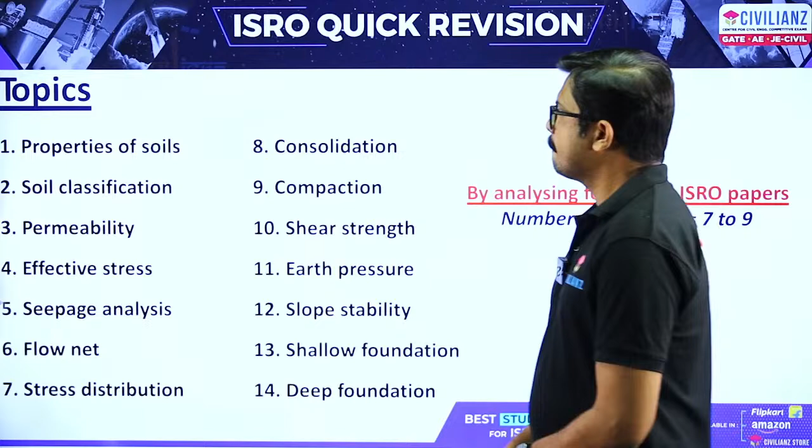So for ISRO questions, generally for 100 marks, maximum mark is 100. Within this 100 marks, 80 marks is for technical and the remaining 20 marks is for non-technical.

Again within this 80 marks, there is a further split: 60 marks from pure technical, and the remaining 20 marks from technical, but related to other subjects like thermodynamics, geoinformatics, that kind of thing you already studied. It's not difficult, but it is technical content from other subjects.

So these are the mark distributions. In the case of geotechnical engineering, by analyzing the past 4-year ISRO papers, these are the number of questions generally asked - that is 7 to 9 questions, generally 8 questions, total 8 questions.

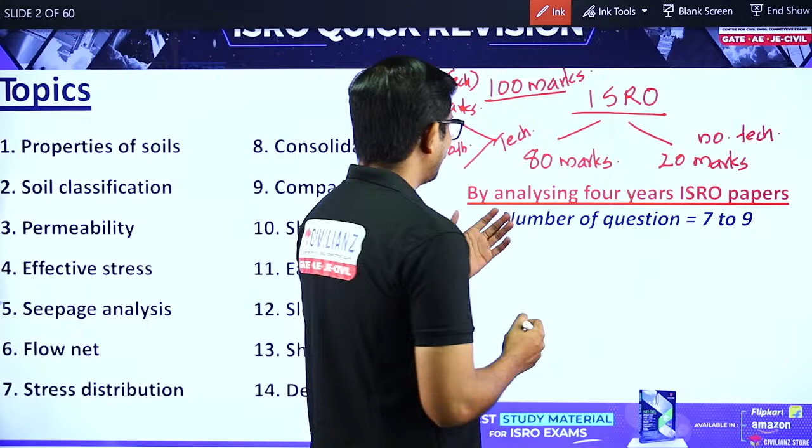If we analyze the past 4-year ISRO papers, in the case of geotechnical engineering, the questions are very easy, very basic. Everyone can do these questions easily. But the main thing is you have to go through all the topics. They are asking very simple questions, not huge formulas or lots of concept questions. But you have to go through the whole topic - these 14 sessions you have to go through.

This session we have designed for 2 hours. At the end of this session, we will discuss the past previous year questions. At that time you will get a clear idea at what level they are asking questions. Our intention is to deal with all the important formulas, everything in a nutshell. If you see this video for 2 hours, 100% sure, please trust me, you will get these 8 questions. We designed this 2-hour session like that.

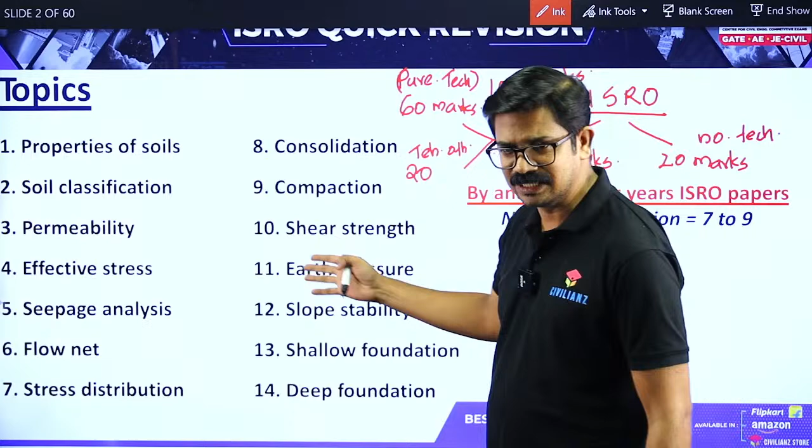So these are the topics - first one is properties of soil. This is the flow of our topics, so you have to study in this manner: properties of soil. The main problem of geotechnical engineering is if you don't know these basics, you can't understand the remaining topics - consolidation, compaction, shear strength, earth pressure, and all. Every topic has some concepts related to it.

Without wasting time, directly we can jump to topics, directly we can jump to questions. Through questions, directly we can study the formulas, basic concepts and all. At the end, definitely we will discuss the previous ISRO questions.

Initially we will do some basic questions. First you try this. The main thing is you have to do it in a very fast manner, and just type in your chat box what will be the answer. Let's start. If you have any question, just type in your chat box.

Okay, this is our first question. I will give you 1 minute for doing this. First you read this question and answer it very fast.

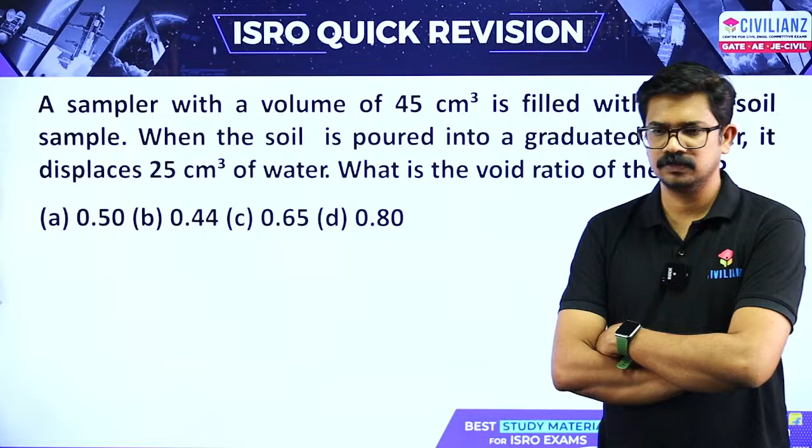Everyone please take a pen and paper and try to do it. Then only this session will be beneficial to you. Otherwise you are simply watching, it is like a cinema. First you try this question, then only you will understand. This question is very easy, it will take hardly 60 seconds, not 30 seconds.

Yes, one person got the answer. So here a sampler volume - volume means total volume, V is equal to 45 centimeter cube with a dry soil sample. When the same soil is poured into a graduated cylinder, it displaces 25 centimeter cube of water. That means, if you take some amount of water into a beaker and drop a pen in there, if it displaces some amount of water, we will get the volume of that pen. Same thing here - the soil Vs is 25 centimeter cube. This question is very direct, very easy.

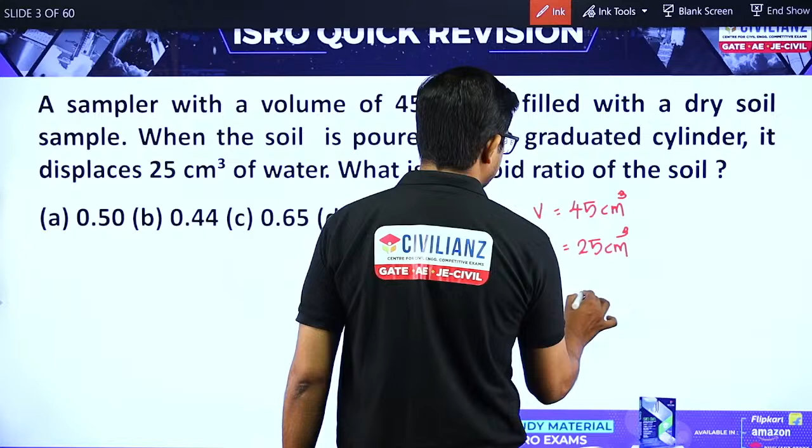So what about the formula for void ratio? e is equal to volume of void divided by volume of solid. Then what about the volume of void? Volume of void means total volume minus volume of solid, so that is 20 centimeter cube.

So here E is equal to 20 divided by 25, that is equal to 4 divided by 5, that is equal to 0.8. Many of you are getting the answer. Very good.

Can I ask one more question related to this void ratio? Which soil is having more void ratio, fine grained soil or coarse grained soil? Can anyone answer: 1. Fine grained soil, 2. Coarse grained soil.

In your chat box just say 1 or 2. Yes, very good, many of you are answering fine grained soil. Okay, very good.

Yes. So in this first chapter, generally for ISRO, if you take past 10 years question papers, they are dealing only with these initial properties of soil. So I would like to say you have to study these formulas by heart, that's all.

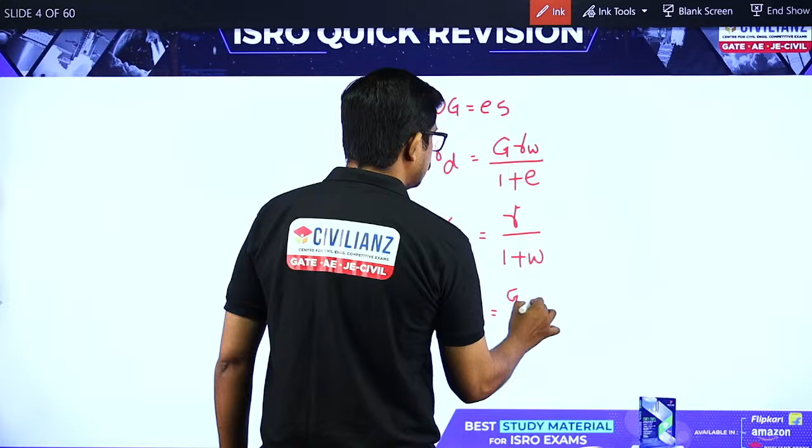Okay, so the first formula, what have we studied? Wg is equal to Es. Then these are the basic important formulas: Gamma d is equal to G gamma W divided by 1 plus E. Then again gamma d is equal to gamma divided by 1 plus W. Then again gamma d is equal to G gamma W into 1 minus Na divided by 1 plus Wg.

So these are very important formulas. Most of the questions you will get by using these formulas. And then another most important formula is...

Here this one is site 1 and next this is site 2. So frequently they are asking this question, that is why I am saying without studying this, don't go to this ISRO examination. So at site 1, initial void ratio is E1, and here gamma D at site 1 is gamma D1, then here this one is E2, here gamma D2, this one is V1 and this one is V2.

So before this, what is gamma D? Can anyone? And then what is gamma S? Most of the students may confuse these two things. What is gamma D? I am not drawing the three-phase diagram and everything, it's a little boring because you people are already familiar with these kinds of things, that is why I am not drawing that three-phase diagram and all.

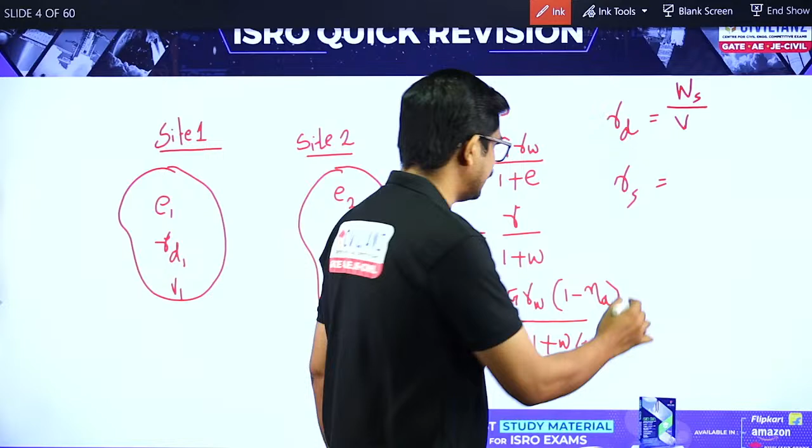So gamma D means Ws divided by total volume, this is very important. Gamma D, gamma sat, gamma D means dry density, unit weight of soil. Gamma D, gamma sat, gamma, these kinds of things are related to the pure site condition.

So if we deal with this unit weight, you have to write here total volume. Okay, then gamma S means this is just the unit weight of that material.

If you take plastic, or if you take the density of steel, can anyone comment the density of steel? What would be the density of steel in kilogram per meter cube? Please write in your comment box. 7850, yes very good, kilogram per meter cube. Very good, Abhiram, Adulya, Vaishnavi, everyone is saying.

So that one is gamma. In the case of soil, gamma S is Ws divided by Vs, volume of that particular material. This one is gamma D.

Then one more thing I need to clarify here is, this one is our ground level. Here the water table is there. Here soil is there. Here water table, this is our ground level.

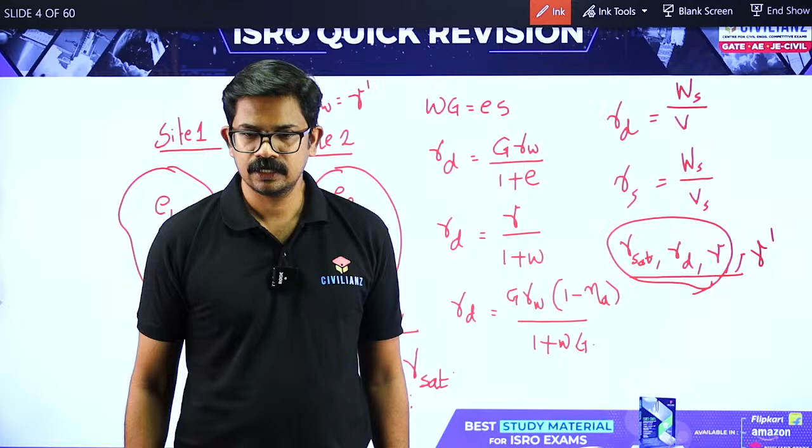Nivedya Peer wrote gamma sat. Very good, so this one is gamma sat. That is very important - definitely some people may misunderstand that as gamma sub. Gamma sub means at the time of effective stress, wherever you see gamma sat minus gamma W, at that time only you will write gamma sub. You can't directly write gamma sub. So gamma sat, if water table is there, you have to write gamma sat. So this one is gamma sat here.

So for gamma sat, one more formula is there like this. Gamma sat is equal to gamma W into G plus E, S divided by 1 plus E. Gamma sat.

So this basic you should know, that is very important. These are very basic things. In geotechnical engineering, there are a lot of concepts like this that you have to know - then only you are able to do numerical questions. Questions are very easy. You can see in geotechnical engineering, the questions will be only 2 lines or 1 line or like that - very easy questions, but there are a lot of concepts within this. So this formula you need to know by heart.

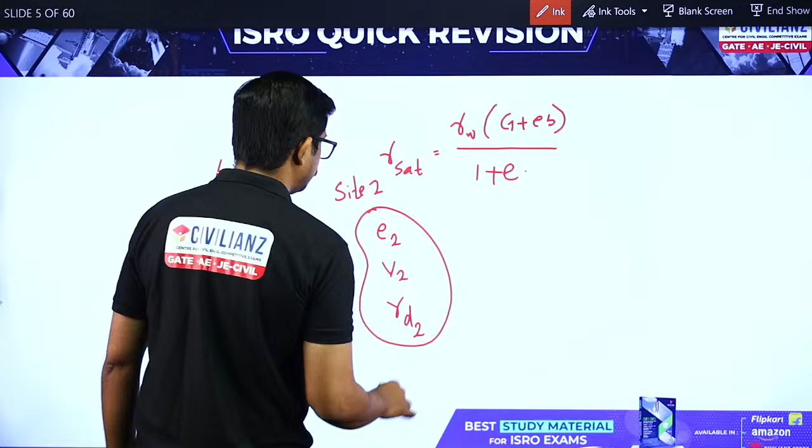So here we stopped - site 1, site 2. This formula is very important, every year frequently they are asking this. I will write here: Site 1, and then site 2. Here void ratio is E1, volume V1, this one is gamma D1; here E2, V2, and gamma D2. So if you are moving soil from here to here, definitely what will happen? Void ratio will change. So there are some relations connecting void ratio, gamma D, V1 and V2.

So first one is gamma D1 divided by gamma D2, that is equal to V2 divided by V1, that is equal to 1 plus E2 divided by 1 plus E1. It is very easy. Gamma D means WS divided by V, that is why inversely proportional. Then one more formula is there, G gamma W divided by 1 plus E - so this one is directly proportional. If you write V2 here, E2 here, V1 here, E1 here. Did you get what I am saying? So this formula is very important, most of the questions we can try using this formula.

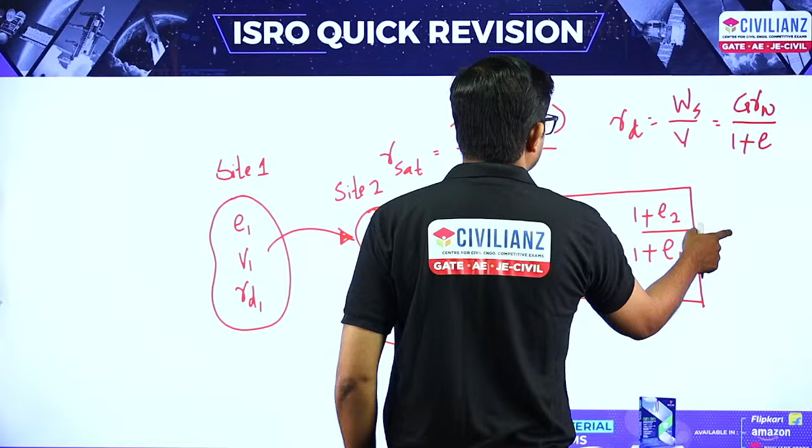Okay, so let us try this question. Try this question - first find out the answer of question number 1, then question number 2. Try to find out this. Whenever you get the answer, just type it in your comment box. Do it very fast. First you just draw the 3-phase diagram, it will give you a clue. If you are very slow in calculation, you can use a calculator, no issue.

This is just a quick revision. So here we are trying to check your memory capacity, which formula you know. Do you remember all the formulas and all? First answer.

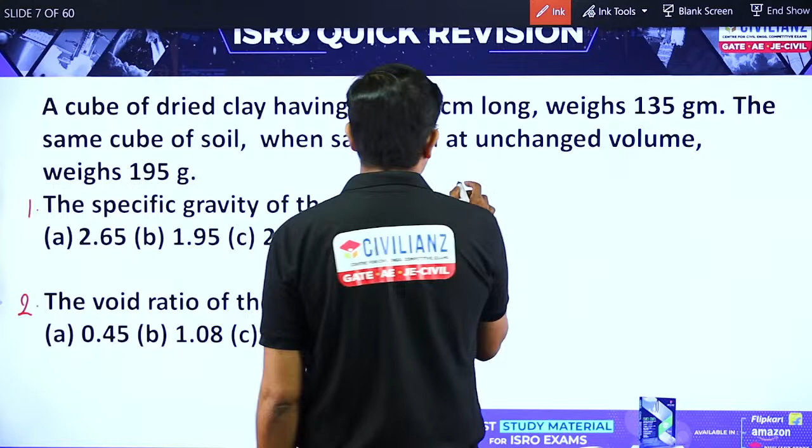A cube of dry clay having side 5 centimeter long. So here 5 centimeter long means - dry clay, they are saying dry clay only, so dry clay means it is like this. What about the volume here? 5 into 5 into 5, that is equal to 125 centimeter cube. So here volume is 125 centimeter cube. Then weight - weight of soil means here 135 gram. Is it okay? Weight is 135 gram.

Same cube of soil when saturated and unchanged volume. Unchanged volume means same cube of unchanged volume, fully saturated. When saturated means fully saturated. Here in question, if they mentioned saturated, means fully saturated - they can't mention fully saturated like that. Saturated means fully saturated, if it is partially, definitely they will mention partially saturated. So here also same, weight of soil is same - it can't change, weight of soil can't change. Unchanged volume, weight - so here total weight is, they have given 195 gram.

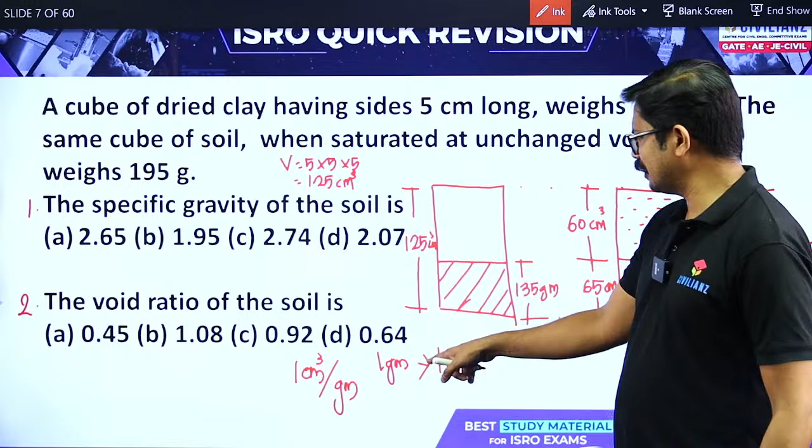So 60 gram of water will occupy how many volume? How much volume? 60 centimeter cube. So what would be the volume here? Here 60, total 125 - they have given without changing the volume, so here 65. Did you get this idea? Did you get the idea of this? 1 gram of water occupy 1 centimeter cube. Yes, very good - Shibna, yes, Nivedya also saying 65. Very good, very good, now everything okay.

Specific gravity G. Specific gravity of soil G is equal to gamma S divided by gamma W. So what about the value of gamma S? Gamma S is equal to WS divided by VS - WS 135 divided by VS 65, WS divided by VS. How much you will get?

2.07 gamma S, gamma W means density I am taking. I am simply writing the formula, that is rho S divided by rho W. Rho W is 1 gram per centimeter cube. So here 2.07 divided by 1, so the answer is 2.07.

First answer. Next, void ratio of the soil is volume of void divided by volume of solid. E is equal to 60 divided by 65, that is equal to 0.92.

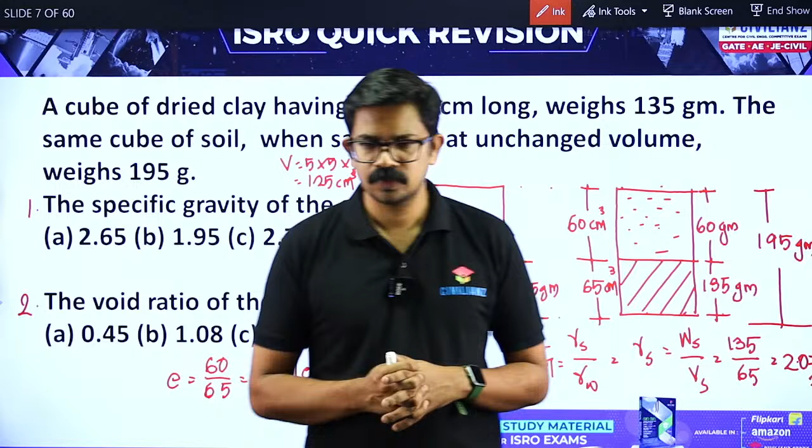Okay. Yes, try this question, beautiful question. For every competitive, most of the competitive examinations, you can see this question. So if you take 5 exams, minimum 2 examinations they will ask this question. In 2 papers you can see this question. So what is the answer?

Option A. Shibna is saying option A. Yes, one more please. Yes, Harinarayan is also saying option A. Yes.

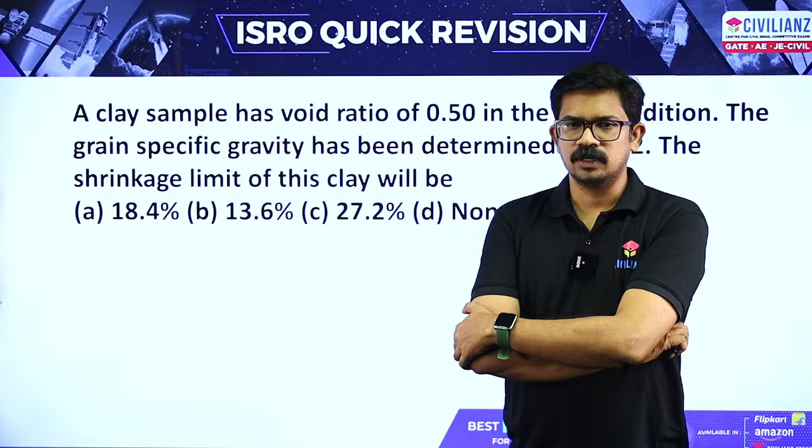Actually, I included only very few questions, basic questions, because for ISRO they are asking very basic questions. They are not going into this much level. They are simply asking what is shrinkage limit, what is gamma D, what is gamma sat, that kind of questions they are asking. So every student, most of the students, those who went for GATE coaching, state PSC coaching, definitely they will get 8 out of 8, 100% sure.

It won't take time. Okay, so class, void ratio. Here void ratio they have given. So before that, you should know what is shrinkage limit. Shrinkage limit means, are you familiar with this?

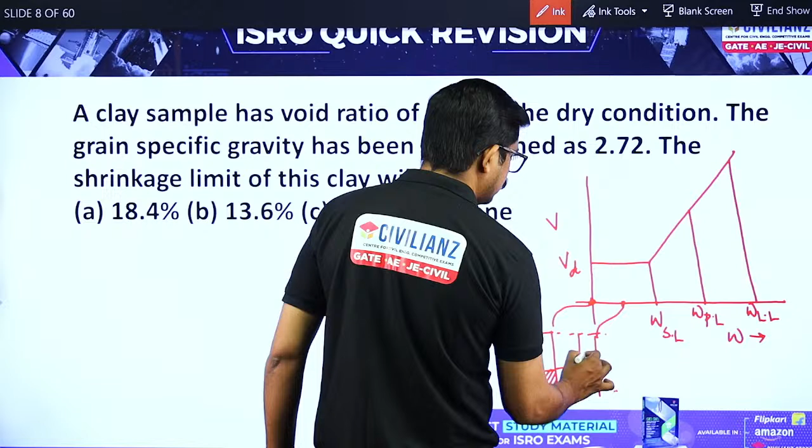So shrinkage limit means it is the minimum water content at which soil is 100% saturated. So if we draw the 3-phase diagram here, you can see dry soil. If we draw the three-phase diagram at this particular portion, without changing volume, without changing the volume, here some amount of water is there, partially. Here within, from this region to this region, soil is partially saturated.

Did you get the idea? Soil is partially saturated. So at this particular point, within this void, the soil will occupy full of water. So that is why we are saying minimum amount of water content at which soil is 100% saturated. Did you get the idea? That minimum is very important. So minimum water content soil is 100% saturated.

So here in this question they have given the value of shrinkage limit. They have asked the value of shrinkage limit. So here the key point is, at this particular point and dry state, what will be the soil condition? Volume are same. Here the volume are same. There is no change in volume from here to here.

So automatically, here void ratio is E. What would be the value of void ratio here? That is also E. So definitely we can write the formula Wg is equal to Es. Our intention is to find out the water content at this particular portion. The key point is void ratio at here and here are equal.

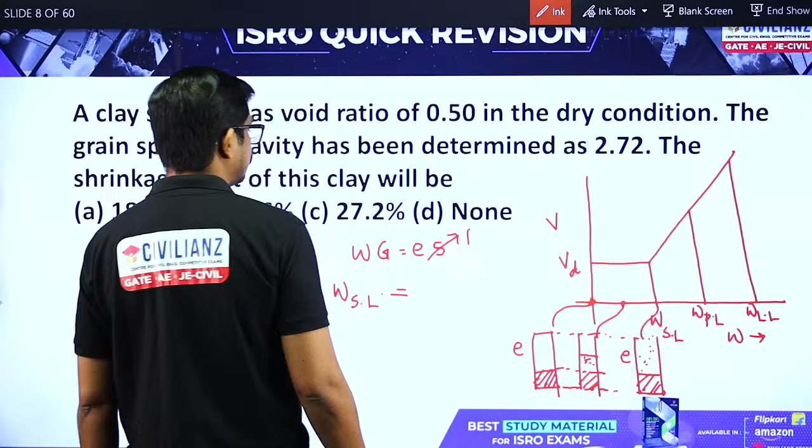That's all. So void ratio they have given. Soil is fully saturated at this particular point. Soil is fully saturated. So W, that is equal to W shrinkage limit into G, that is equal to E. S is equal to automatically 1, fully saturated soil. So W is equal to 0.5 divided by 2.72. So what would be the answer? 0.184 is the answer.

So for every competitive exam, if they ask questions from this particular topic, meaning liquid limit, shrinkage limit and plastic limit, the most important question they will ask from this shrinkage limit. Okay, so you have to study shrinkage limit in geotechnical engineering, that particular topic, liquid limit, plastic limit and shrinkage limit. You have to study shrinkage limit. Okay, so at a glance we can say, so what is the liquid limit?

What I am elaborating in this particular portion is that in the past 10 years, they have been asking questions only from this particular topic. That is why if a student just studies these basics, properties and all, they will definitely get a minimum of 4 questions. That is why I am elaborating, not simply going with the formula and all.

So here, water content, volume, shrinkage limit water content, plastic limit, liquid limit.

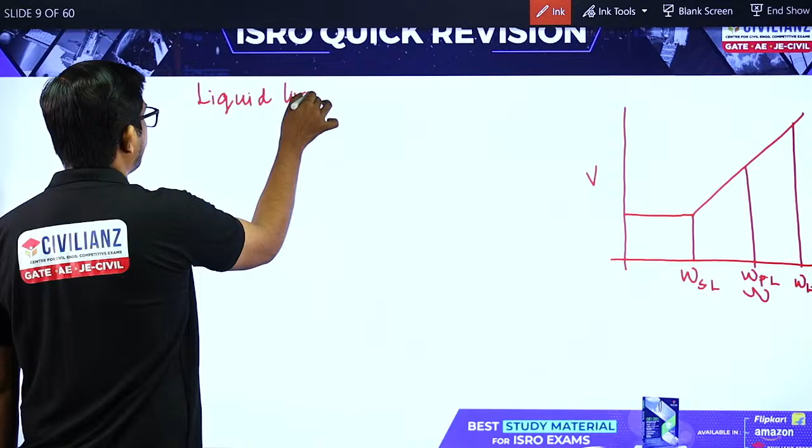What is liquid limit? Yes, very good, 2.7 kilopascal. So it is the water content at which... I am expecting that kind of answer, not the water content at which soil changes from liquid state to plastic state. So that is the correct answer. Vaishnavi is answering that shear strength of soil is equal to 2.7. Very good. So it is the water content at which the soil has an arbitrary shear strength equal to 2.7 kilopascal. At that particular point, the value of shear strength is equal to 2.7 kilopascal.

So anyway, liquid limit means we can mix the soil with water. At that particular point, if you mix any soil with water, liquid limit means that the value of shear strength is equal to 2.7 kilopascal, that's all.

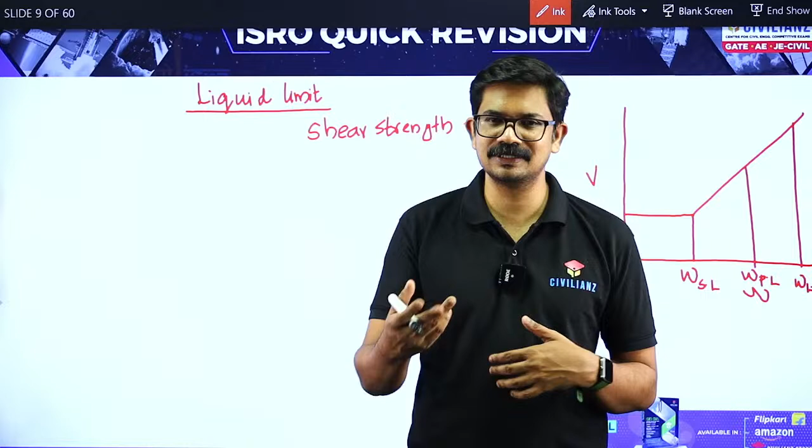That is why, while doing the Casagrande test for finding out the liquid limit, we are using the Casagrande apparatus, and they are taking 25 number of blows. At 25 number of blows, the soil will attain 2.7 kilopascal. So one more definition is there: it is the water content corresponding to 25 number of blows in a Casagrande apparatus. So if someone asks you what is liquid limit, at the time of interview you have to say this kind of answer. That is very important.

Okay, liquid limit, then plastic limit. Plastic limit is the water content at which we can mold an arbitrarily fixed shape of a certain dimension, of size 3 mm. That is why we are saying thread test. Here, arbitrarily fixed shear strength, arbitrarily fixed size. Vaishnavi is answering 3 mm. Very good, I am very happy.

Then shrinkage limit, which we have already discussed. It is the minimum water content at which soil is 100% saturated. At this particular water content, we can mold that soil into different shapes, we can deform it without breaking or cracking. Did you get the idea? So these things are very important.

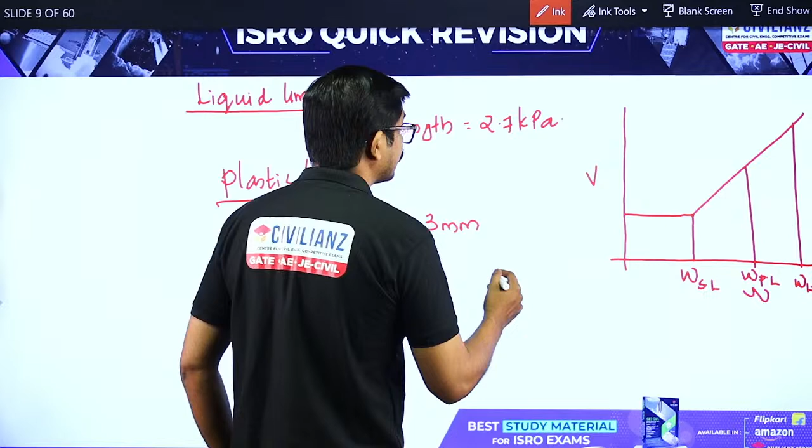And then another important thing is some indices: liquidity index, plasticity index. The first one is plasticity index, IP, equal to WL minus WP. Shrinkage index is WP minus WS. Toughness index is IP by IF.

Then liquidity index, these two are very important. Liquidity index equals W minus WP divided by IP. Then consistency index equals WL minus W divided by IP. So these two are very important.

Most exams ask these two things: liquidity index and consistency index. But in geotechnical engineering, plasticity index is very important. For exam point of view though, these two are very important. Look at liquidity index, W minus WP divided by IP. If we add IL plus IC, that is equal to 1.

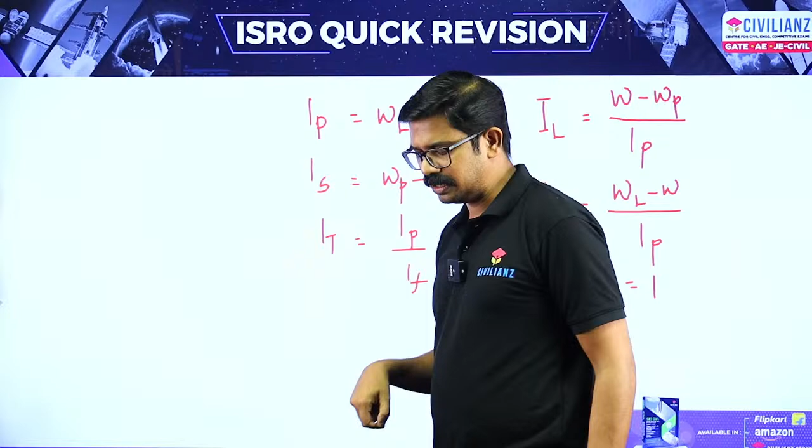So at least you have to study these formulas, you have to remember them before going to the exam. That's all you have to do daily. Once you wake up at 5 or 6 o'clock, you just go through this formula in your formula book.

Try this question. Beautiful question, you can use a calculator also, no issue. It will take hardly 1 minute. It is not an essay type question, very easy question. Try this, and once you get the answer, just type it in the comment box.

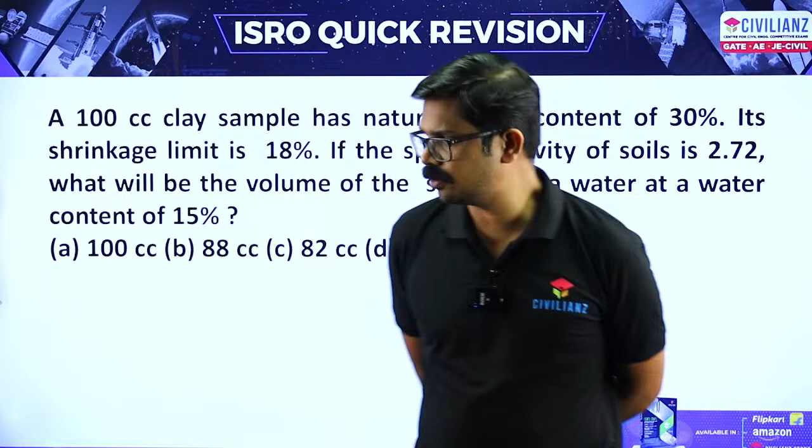Option A. Archana is saying option A. Is there any other answer? Vaishnavi also says option A, okay.

Let me try this question. Option A means 100 centimeter cube. So a 100 centimeter cube clay sample has a natural water content. So volume, they have given V1, that is equal to 100 centimeter cube.

So in our classroom, we have done almost 30 to 60 questions like this. Okay, water content.

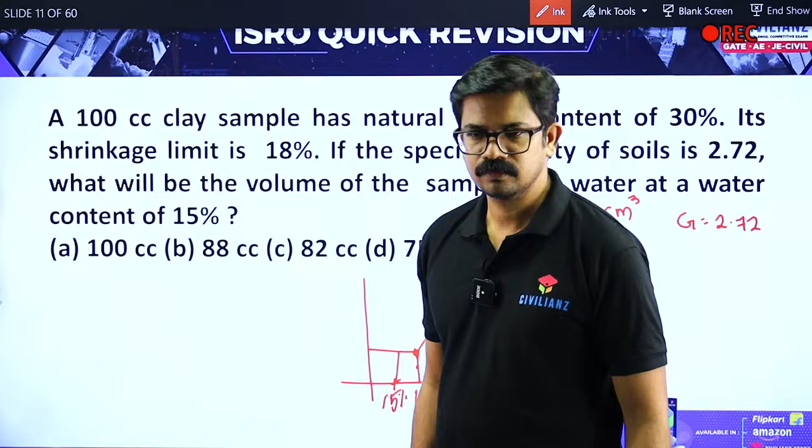Then what would be the volume here? At 18% and 15% the soil is having the same volume. So what do we have to do? We have to find out the volume at this particular water content. Did you get the idea? Here at 18 and 15% the soil has the same volume. The question asks what would be the volume of sample at 15%.

At 15%, what would be the volume for that water content? W2 is equal to 15%. 15% means same as 18%. If you find out the 18% volume, that's okay. Here soil is fully saturated at this particular water content, so Wg is equal to eS, and definitely here you will get the value of E1.

What would be the value of E1? E1 is equal to 0.3 into G, 2.72. So what will be the answer? 0.3 into 2.72 equals 0.816.

E1 done. Next, water content given is W2 or WSL, equal to 0.18. G remains 2.72. So we consider E2 equal to 0.18 into 2.72, which is 0.489.

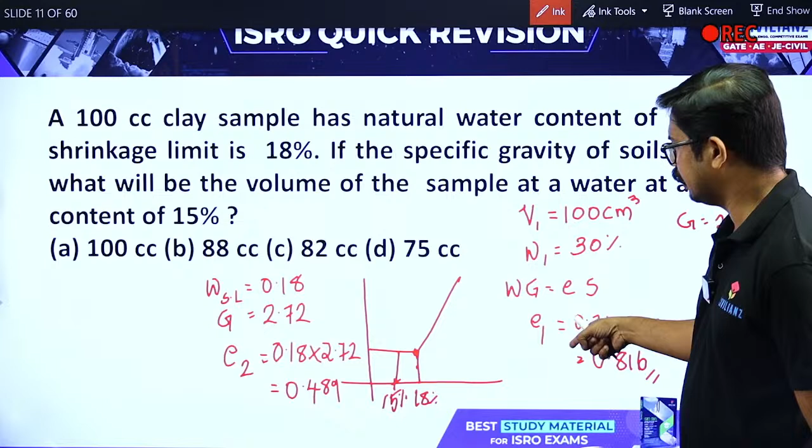E2 is 0.489. So here we know V1, E1, E2. We need to find out V2, the volume corresponding to this void ratio. Which relation will we use? V1 divided by V2 equals 1 plus E1 divided by 1 plus E2.

Here V1 is 100, V2 is what we need to find out. 1 plus E1 means 1.816, divided by 1.489. So 100 into... 1.489, that's 148.9, divided by 1.816, equals 81.99, so 82 is the answer.

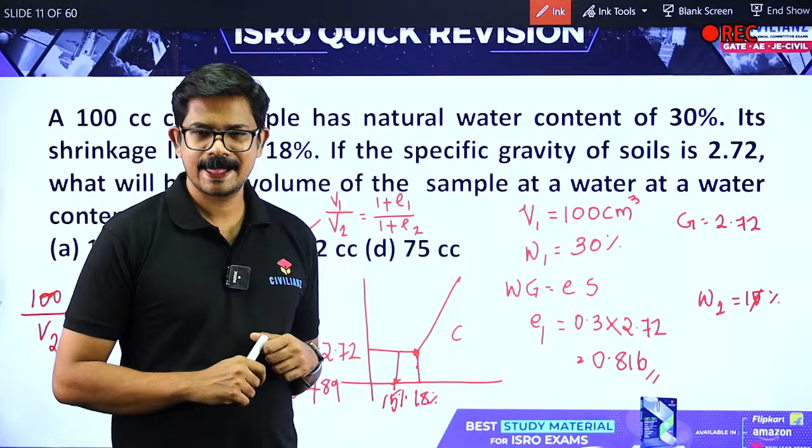82, option C. Then how do you get 100 centimeter cube? What is the logic behind that? Is it clear? This formula is very important: V1 by V2 equals 1 plus E1 divided by 1 plus E2. We can apply this formula many times indirectly.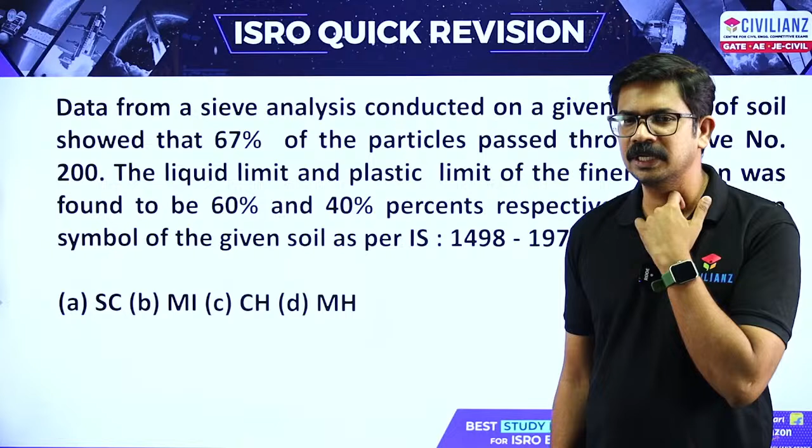No. Yesly, no. Okay. Yesly first commented no, then C. Okay, C, yes. I thought Yesly you didn't understand the last question, that is why I am asking. Did you get the last question? Yesly, did you understand the last question? Okay.

Data from the sieve analysis conducted on a given sample of soil show that 67% of particles pass through sieve number 200. So sieve number 200 means, what is sieve number 200? Sieve number 200 means sieve size of 75 micron. Then sieve number 4 means 4.75 mm. At least you have to study these two sieve numbers.

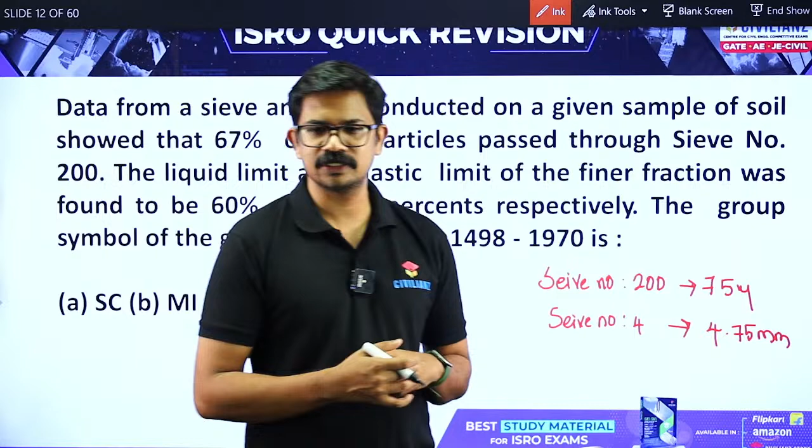Can anyone explain what is the connection between sieve number and sieve size? Is there any connection between sieve number and sieve size? Please comment, quick, comment it in a short way. Very good, Vaishnavi is saying number of holes per inch. Exactly, number of holes per inch. Take just one linear inch dimension, just count the number of holes.

If you take a linear inch dimension of 1 inch, for 75 micron size holes, you can see 200 number of holes. Here for 4.75 mm, sieve number is 4, meaning 4 number of holes. That's all. Okay.

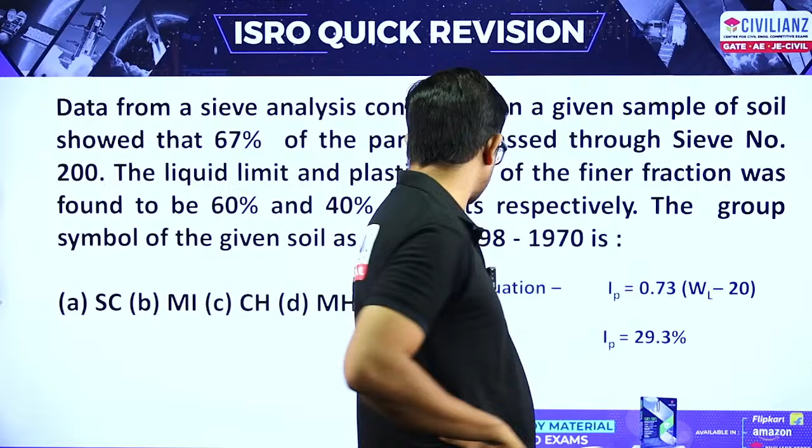Then in this question they have given data like this. So here we have to use the plasticity chart, A-line formula. This A-line formula itself they have asked several times. No need to draw the A-line plasticity chart and all, but you have to study this A-line formula: IP is equal to 0.73 into WL minus 20.

So what would be the value of IP by substituting WL here? 29.3. Then IP by using our usual formula: IP is equal to WL minus WP. WL minus WP means 60 minus 40, that is equal to 20% here.

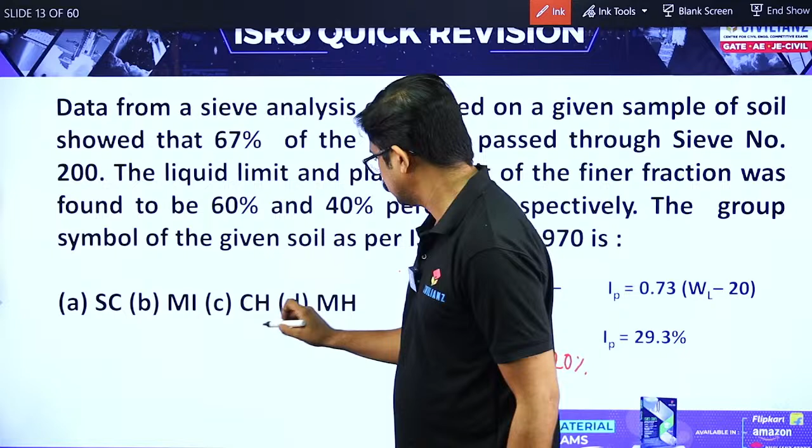What do you have to look at? Whether this value is greater than or less than this A-line formula IP. If it is below the A-line, that soil is silt or organic. Did you get the point? Here this value, 20, is less than 29.3, so it means that soil is silt or organic. Just check in your options if it is silt or clay there, so we can remove these two. Either this one or this one is our answer.

Then just look at the liquid limit value. Here the value of liquid limit is less than 35%, it is low compressible. If it is between 35 and 50%, it is intermediate compressible. Then if it is greater than 50%, highly compressible. So here greater than 50%, 60, so here silt, highly compressible silt.

The same question they asked in our last Kerala State PWD examination, Kerala State PSC PWD examination. Same question they asked, the same question that we did in our class also, without changing the numerical value. Okay.

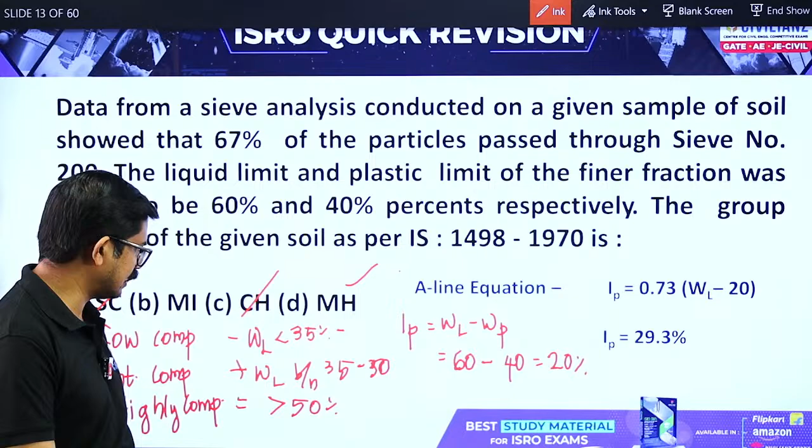Sometimes they will ask directly A-line formula. What is A-line formula for IP? Sometimes they will ask plasticity chart. Sometimes they will ask what intermediate compressible means, or highly compressible means. The value of liquid limit between, or liquid limit greater than 50% or something like that.

Okay, this question is very important. You have to study this question. You have to just mug up this question. Okay, try next question.

What is the answer? Quick. One word type of question. Just read this: flow through the soil is laminar when? Reynolds number is less than 1.

So in the case of pipe flow, what would be the value of Reynolds number? Just comment it, Reynolds number should be less than, just comment that number. In the case of pipe flow, yesterday you have studied, Anand sir already took pipe flow, water flowing through pipe. Yes, 2000. In the case of open channel flow,

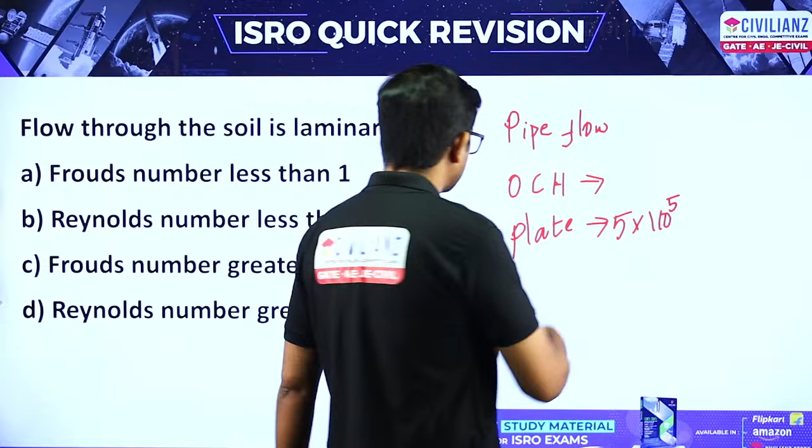These are the things that you need to remember in the case of Reynolds number. Okay, these are the previous questions: pipe flow, open channel flow, plate flow, and all.

Yes, so try this question. During permeability test on a soil sample with a falling head permeameter, equal time intervals are noted for drop from H1 to H2 and again from H2 to H3. Then, condition. C is the answer, they are saying.

Yes, so here, permeability K is equal to AL divided by AT into log H1 by H2 to the base E. That is the equation. So here in this question, this one is H1 and this one is H2 and this one is H3.

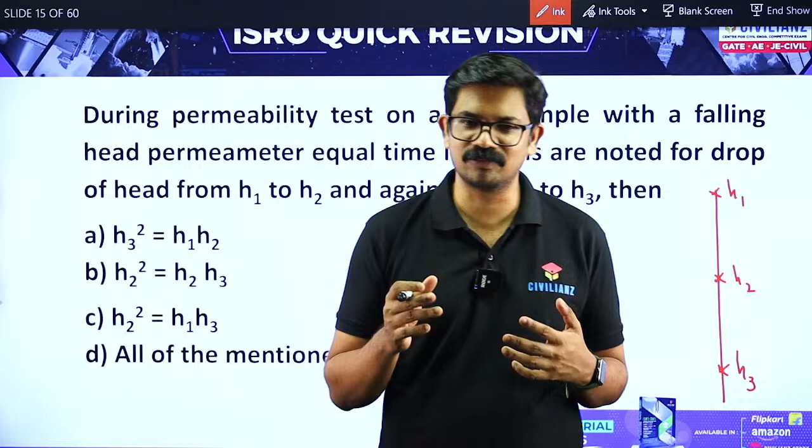Actually, this session is just a revision. If you don't have thorough knowledge regarding this permeameter, hydraulic gradient, this and that kind of thing, definitely you can't understand. Okay, so once you sit in our classes and once you are familiar with all the concepts, then only you will understand what we are saying. Otherwise, students, they won't understand what is this line, what he is saying. Okay.

So first you study the concept, what is falling head test, then how this formula arrived. So here, this one is H1 and this one is H2 and this one is H3. So here in this question, they have given this one is T, same time. Time is the same.

So we can write T is equal to AL by KA into log H1 divided by H2 to the base E. So both the times are equal, H1 to H2. Then again we can write AL by KA into log H2 by H3 to the base E. So here we can write H1 by H2 is equal to H2 divided by H3. So here H2 square is equal to H1 H3. Option C is the answer.

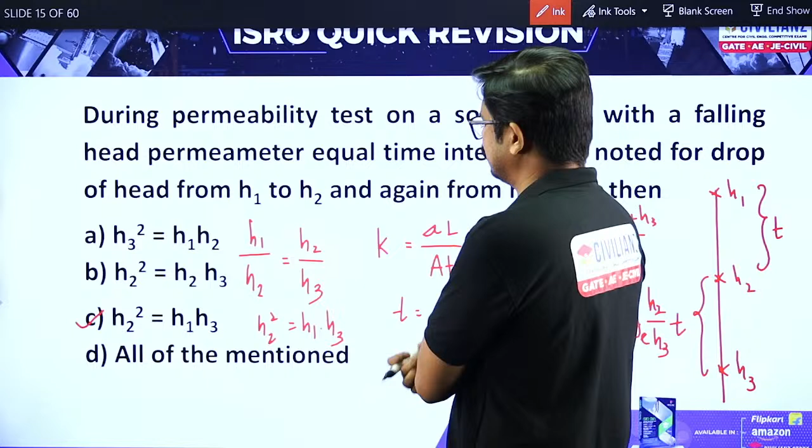So most of you may think that H1 plus H3 by 2, that is the answer - H2 means if same time. But it is not like that. Here logarithm came, so that is why H2 square is equal to, or H2 is equal to root of H1 H3. So many times they ask this type of question for ISRO, SSC, JE, that kind of examination. Okay.

So this one is falling head. If it is constant head test, what is the formula? Basic formula we are using: Q is equal to K into I into A. Basic formula.

What is the unit of coefficient of absolute permeability K? Anyone please respond? Vaishnav and Shibna answered already.

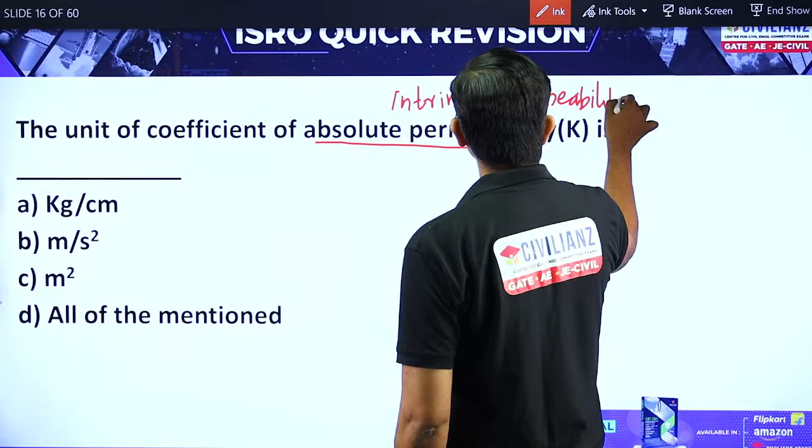So here the question is the unit of coefficient of absolute permeability, otherwise called intrinsic permeability. The unit is meter square, or centimeter square, or something like that. So permeability, here in geotechnical engineering, simply permeability means coefficient of permeability. Unit of that coefficient of permeability is meter per second. Q is equal to, or V is equal to Ki. So this one is intrinsic permeability or simply permeability.

So here, this permeability and the permeability that we studied is entirely different. This one is related to that particular solid material. In soil, what we are doing, in between, our fluid is flowing, that is related to our fluid. So this concept, absolute permeability or intrinsic permeability, is mainly used for mining purposes and all.

If you just search in Google, you will definitely get the definition and all. The definition is a little bit huge, that is why I am not elaborating that particular topic. So for mining engineering and that kind of studies, they are using this absolute permeability.

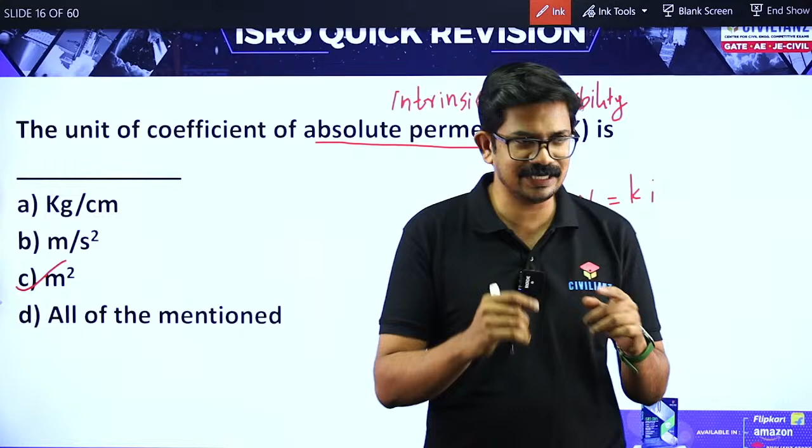In geotechnical engineering, that is related to fluid. Here we are not dealing with a particular material's porosity. That absolute permeability is related to that particular material. Here the fluid that is flowing, we are dealing with that particular fluid, related to that particular fluid and material. That is hydraulic conductivity. So unit is meter per second, centimeter per second, or something like that.

In hydrology, sometimes you may study this. In that hydraulic conductivity topic, one topic is there: confined aquifer, unconfined aquifer. In that particular topic you will study this.

Then seepage analysis is done on the assumption of... what is the answer? Seepage analysis means, what is seepage? Flowing of water. Here in our case, the water will flow from top to bottom or bottom to top. So these are the two cases. So here the critical condition, two flows are there: upward flow and downward flow.

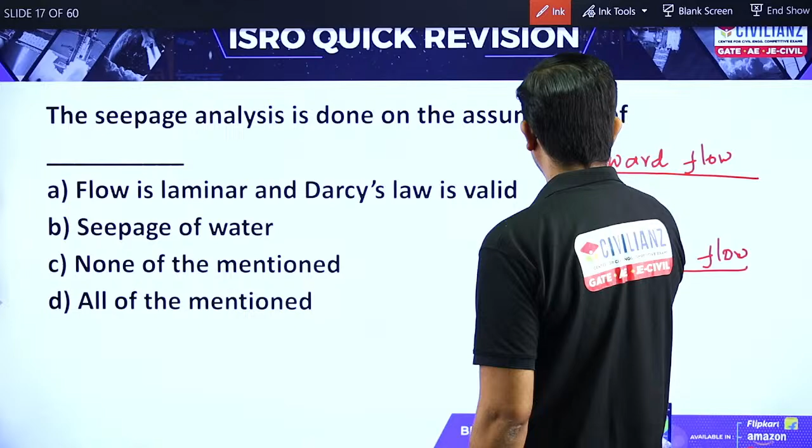So which one is the critical condition? Water flow through the soil, upward or downward, which one is the critical condition? Here upward is the critical condition, upward seepage is the critical condition. At that time only, the value of effective stress will become 0. So that is the critical condition.

So seepage is very important for any exam point of view. That particular topic, seepage analysis, is very important. So if you want to deal with consolidation analysis or settlement analysis, you should know seepage analysis, effective stress, permeability and stress distribution. If a student doesn't have a very good concept about this particular topic, they can't do consolidation analysis and all.

Sometimes they may ask simple formulas and all. For ISRO it is okay, but for GATE and all it is not possible. For GATE, engineering service examination, it is not possible. You should know the clear concept, then only you can answer that kind of question.

Anyway, for seepage analysis you should know the first basic formula, critical hydraulic gradient. That is very important. Directly I am jumping into that, critical hydraulic gradient, IC. What is IC? At that particular hydraulic gradient, what would be the value of effective stress? Please comment, can anyone respond? Yes, 0. So at this particular point, the value of effective stress is equal to 0.

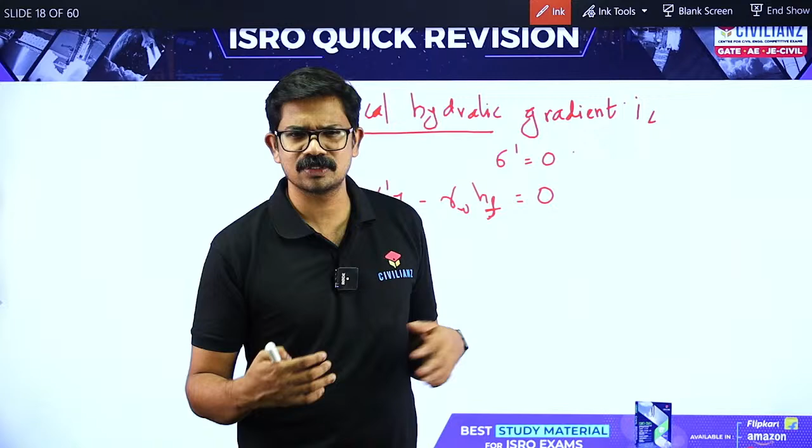So here you will get upward seepage: gamma sub into Z minus gamma W into HF is equal to 0. So this one is HF, HF means head loss. Here I am not drawing the diagram, not saying how we will arrive at this formula and all, so you have to study that because we don't have that much time. Definitely if you are sitting in this class, if you don't know the clear idea about this seepage analysis, how to find out the effective stress, you can't understand what I am saying. 100% sure.

Okay, so first you have to study all the concepts of effective stress, seepage analysis, how you arrive at this formula and all. Then watch this video.

By rearranging this, gamma sub into Z is equal to gamma W into HF. So HF by Z is equal to gamma sub divided by gamma W. So this HF by Z, that is equal to IC, first formula, gamma sub divided by gamma W. This is our first formula. If you know the value of gamma sat, within seconds you can find out the value of IC.

Did you get the idea? If you know the value of gamma sat, directly you can find out the value of IC. One more formula is also there.

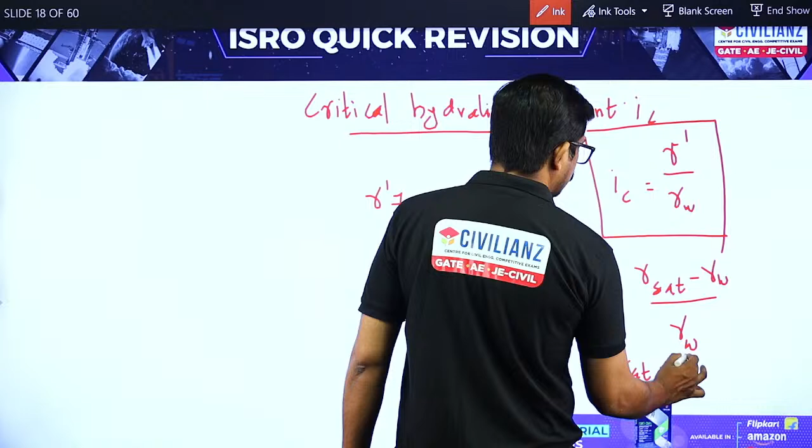Here IC is equal to gamma sat minus gamma W divided by gamma W. If you substitute gamma sat is equal to gamma W into G plus E divided by 1 plus E, G plus E divided by 1 plus E here, you will get one beautiful formula, that is equal to IC is equal to.

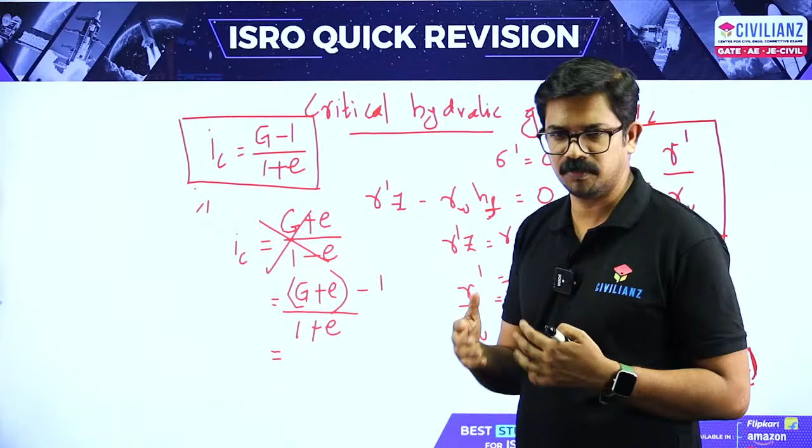this much is sufficient. For GATE and other competitive examinations, ESE, you have to study how to find out the value of effective stress while water is flowing in upward direction, while water is flowing in downward direction, and then what would be the value of pressure head, total stress, datum head, everything. That you should know the concept of that kind of thing.

Then only you are able to do the numerical questions. Okay, now try to find out this question. Uniform sand stratum 2.5 meter thick, has specific gravity 2.62 and natural void ratio 0.62. Hydraulic head required to cause quicksand condition in the sand stratum.

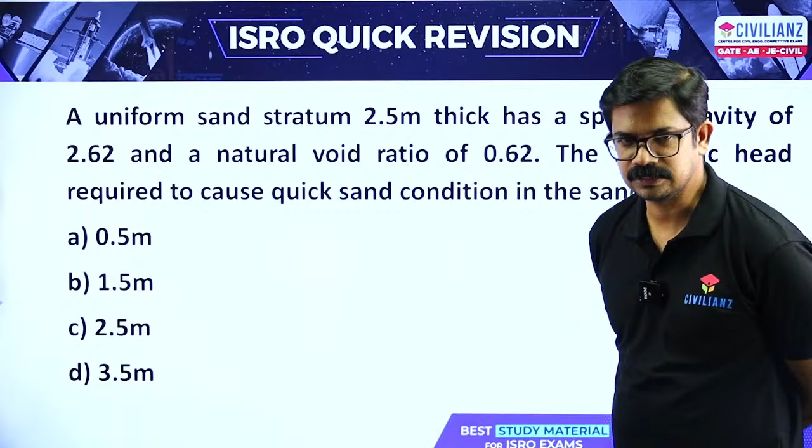Option C. Adulya's answer, option C, Nayana's answer, C. Yes. So here same equation.

IC is equal to G minus 1 divided by 1 plus E. So here G that they have given, 2.62 minus 1 divided by 1 plus E, 0.62. So while solving this, IC is equal to 1. So IC means HF divided by Z, that is equal to 1.

So here this one is very important, the hydraulic head required to cause quicksand condition. Hydraulic head required to cause quicksand condition means HF. That is HF is equal to 1 into Z, that is equal to Z means 2.5. So answer is 2.5. So sometimes you may confuse, H means head of water in the piezometer. So here in this question they didn't mention that head of water in the piezometer. Just understand this terminology, the hydraulic head required to cause the quicksand condition means the HF.

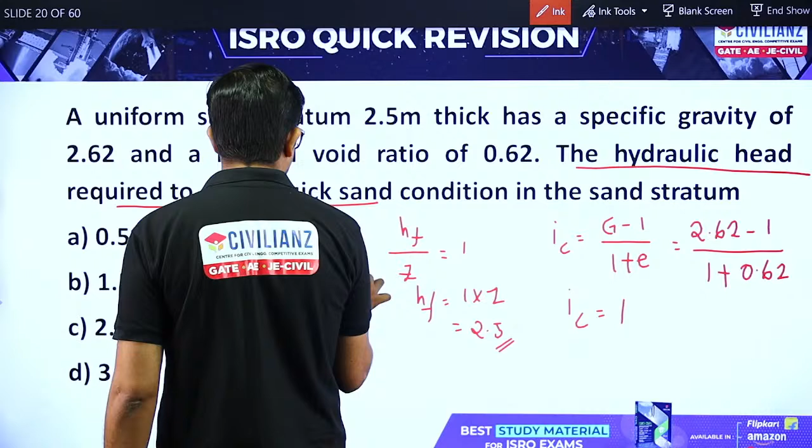HF means head loss, or sometimes they may use this word, or another word they are saying head causing flow. In questions they may ask head causing flow. Sometimes they may say head causing flow, head loss, head required to cause quicksand condition. Their intention is head loss HF. You need to find out the value head loss. Yes, that's all.

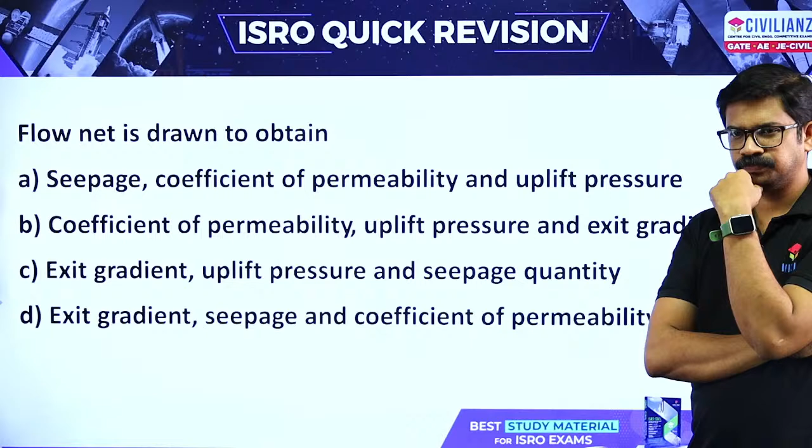What is the answer? Flow net is used to obtain. Yes. Adulya's answer is option C.

So here flow net, only one formula that you have to remember. That is Q is equal to K into HF into NF divided by ND. This one is for isotropic soil condition.

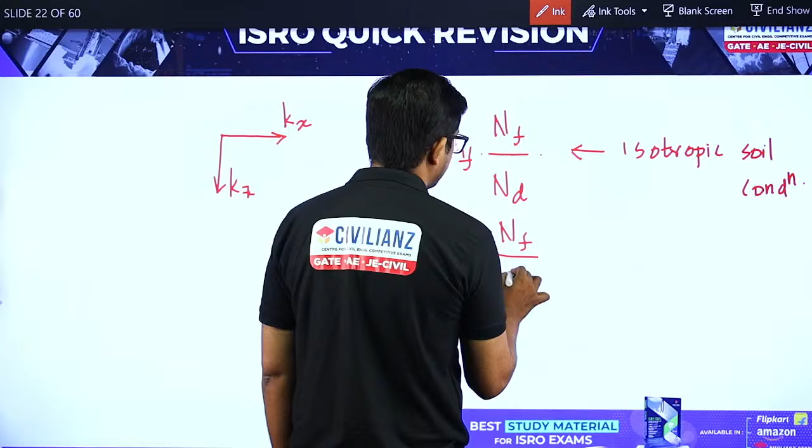Then Q is equal to, so here flow in x direction, that is Kx. This one is flow in z direction, that is Kz. So that means anisotropic condition. So that means K dash into HF into NF divided by ND. At least you have to study these two formulas from this topic. So this one is for anisotropic soil. So what about the value of K dash? Root of Kx into Kz. Can anyone say what is this NF and ND?

NF, just type in your comment box. NF, number of flow lines, option A. Number of flow channel, option B.

A or B? Number of flow channel or number of flow lines? Anaga, Adulya, Vaishnav, Shibna, everyone are saying option B. That is very important.

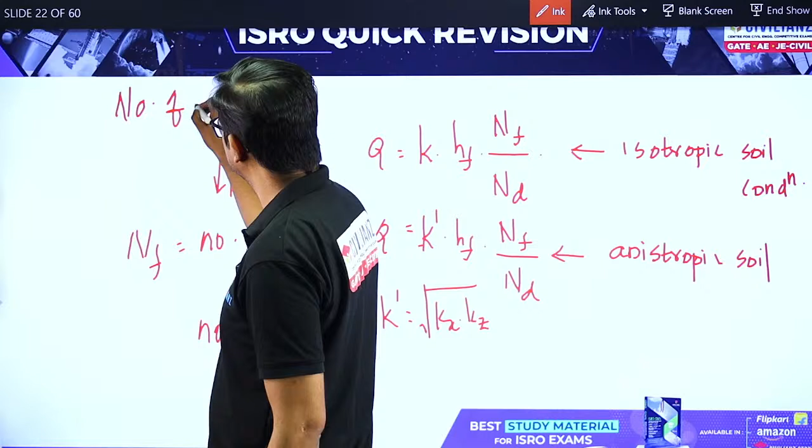Number of flow channel, that is B, and that is NF. So in question, if they have given number of flow lines, if number of flow lines is 5, then how many flow channels are there? Can anyone please respond? Yes, very good. 4 flow channels.

So flow channel means it is like a pipe. So if you put a pipe like this, water will flow in this direction. So what is the significance of this flow channel? It tells us at what direction the water will flow. So if you put this pipe like this, water will go through in this fashion.

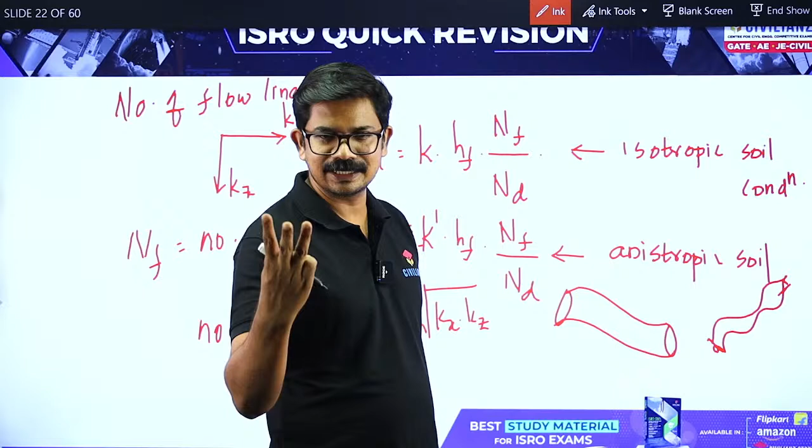So flow lines means like this. These two red lines are flow lines. The space between these two lines, that is what we call flow channel. Did you get the idea? So if 2 lines are there, only 1 flow channel. If 3 lines are there, 2 flow channels.

By the same manner, ND means, what is ND? Equipotential lines or equipotential drop? Equipotential drop. Number of equipotential drop. So once you get all this value, by simply substituting this formula, you will get seepage.

Once you know the value of equipotential drop, directly you can find out how much water will be there in the piezometer. Or what would be the value of HF, that also you can find out at that particular point. And effective stress also you can find out once you know the value of U. If you know the value of U, directly you can find out the value of effective stress also.

Now you try to answer this. Now just try to answer this question. Flow net is drawn to obtain. Here there is no chance to find out the coefficient of permeability. Here while drawing this flow net, there is no way to find out the value of permeability.

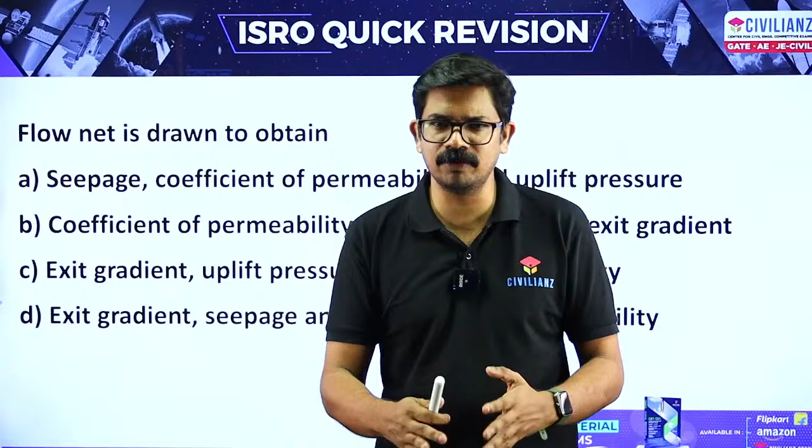Once you know the value of permeability, you can find out the value of seepage. That you have to find out by using another method, by using a permeameter, constant head permeameter or something like that. Okay, once you get permeability, then we can draw the flow net. So here, remaining option C, all options are dealing with the coefficient of permeability. So option C is the correct answer.

Exit gradient, uplift pressure, and seepage quantity Q. Uplift pressure means once you get the value of U at different points, you can find out the value of water in the piezometer. Then you can draw the pore water pressure diagram, take the area of that pore water pressure, and you will get the uplift pressure or uplift force. You can find out. Then exit gradient.

At every point you can find out. Wherever you just keep the piezometer on that flow net, you can find out the value of hydraulic gradient also. So these are the significance of this flow net. So at least you have to study that formula: Q is equal to K into HF into NF divided by ND. Okay, that's all.

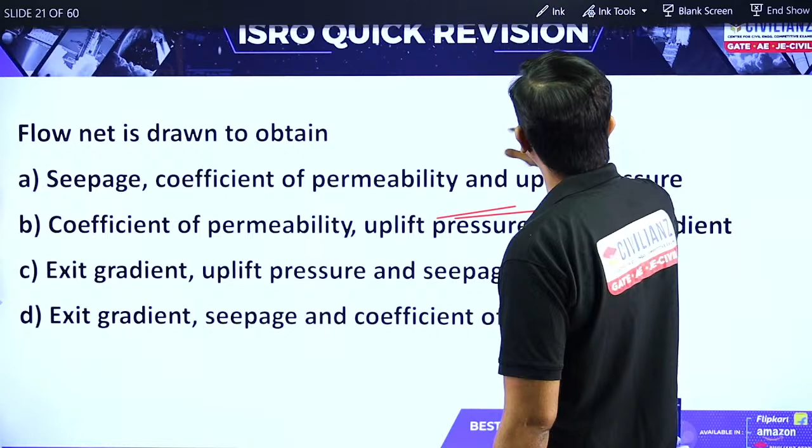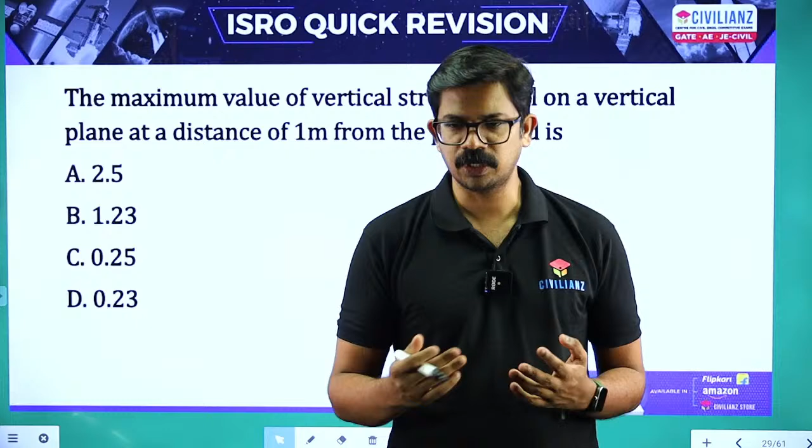Yes, so try this question. Try this question. Vaishnav, please respond. Is everything okay? I mean connection, network connection, my voice and everything. Please respond in your comment box. Am I audible or not? Okay, okay, thank you, thank you.

Now try this question. Beautiful question, this question is a beautiful question. If you have a clear concept, within seconds you will get the answer. What is the answer?

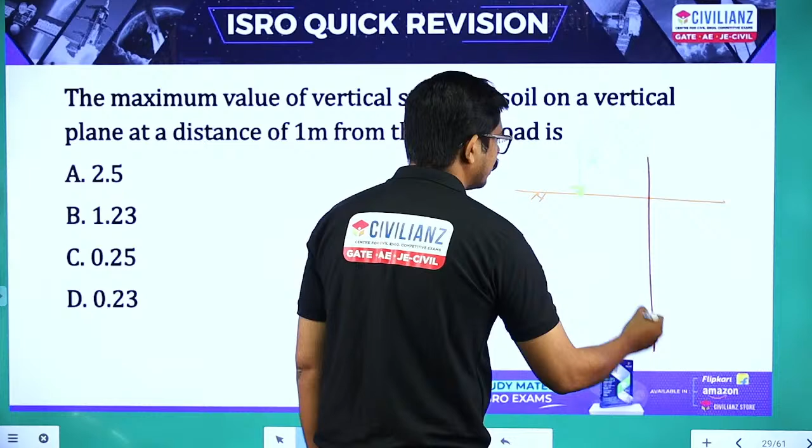Maximum value of vertical stress on soil on a vertical plane at a distance of 1 meter from the point load. What is the meaning of this question? Here this is our ground level, one point load is there, Q. And then here vertical plane, 1 meter from here. So if I take a vertical plane at a distance of 1 meter from here, maximum value of vertical stress corresponding to this vertical line - where is it? So if we draw the vertical stress distribution, graph is like this. So here maximum value occurs here.

What about this angle? Can anyone please comment? So this is the maximum value. What about this angle? Please comment that value, very very important. 39.15. Yes, very good. Theta is equal to 39.15 degree. Very important.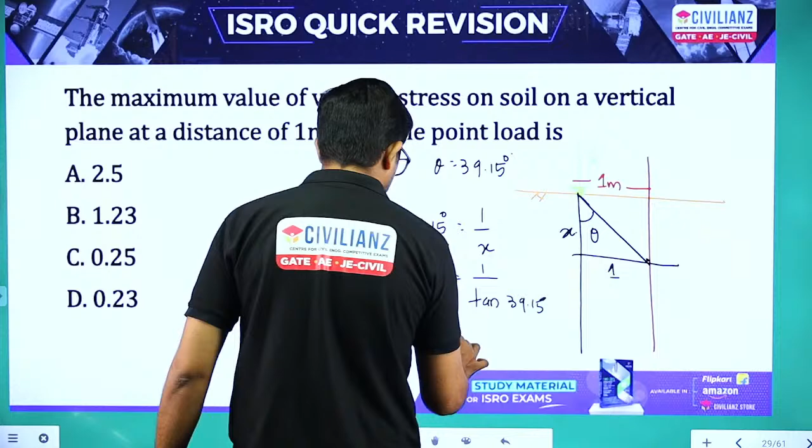So this one is 1 meter. This x we need to find out. So tan 39.15 degree is equal to 1 divided by x. So x we need to find out: 1 divided by tan 39.15 degree, that's all. So 39.15 degree, what is the answer? 0.814. 1 divided by 0.814, so answer is 1.23.

So try to remember this value, 0.814. That is very important. For state PSC, Kerala state PSC or other state PSC examinations, sometimes they may ask this type of questions. The students should remember this value, that tan 39.15 is equal to 0.814. Try to remember that, try to learn by heart that value in your formula book. You have to write that 0.814, tan 39.15 is equal to.

Okay, option B. Some students are saying a correct answer. Then, what is the answer of this question?

Excess pore water pressure is also known as, QC. Excess pore water pressure is also known as, that is hydrodynamic pressure, that's all. Option A, hydrodynamic pressure or excess pore water pressure.

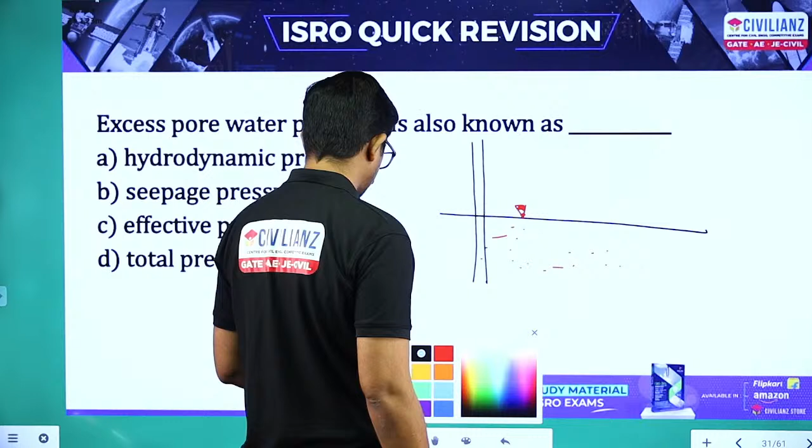So here, if you are dealing with consolidation, here water table is here. If we keep our piezometer here, immediately after the application of load Q kN per meter square, some amount of water will rise from here to here. So this one is U, that is static pore water pressure. Up to water table, some amount of water will rise, that is static pore water pressure. Pore water pressure is studied in the effective stress chapter.

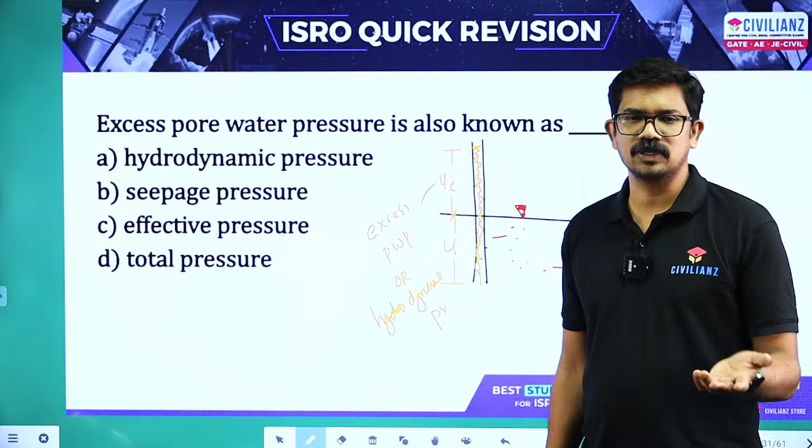So immediately after the application of load, some amount of water will rise corresponding to application of this particular load. So this one is UE, that is excess pore water pressure or hydrodynamic pressure, we can call this hydrodynamic pressure. So whenever this excess pore water value reaches here, that means end of consolidation. So consolidation start means this excess pore water pressure will slowly diminish. Whenever it reaches 0, means it reaches the ground level, which means consolidation has already occurred, or at the end of the consolidation. That point is the end of the consolidation. So that is why excess pore water pressure is also known as hydrodynamic pressure.

That is the question they asked. What is the answer of this question?

Reduction of volume of soil which is due to squeezing of water from void is: primary consolidation, secondary consolidation, load increment, or effective pressure? Primary or secondary consolidation, that is the correct answer. So answer is primary consolidation.

So initial consolidation is there, primary consolidation is there, secondary consolidation is there. Initial consolidation means the consolidation that occurs immediately after application of load, that is sometimes due to compaction or squeezing out of air or something like that - immediate settlement. Primary consolidation means that is what we are studying: excess pore water pressure diminishing, the squeezing out of water from the voids or something like that. Then secondary consolidation means after all the water is squeezed out, some plastic rearrangement occurs in the soil, so that is secondary consolidation.

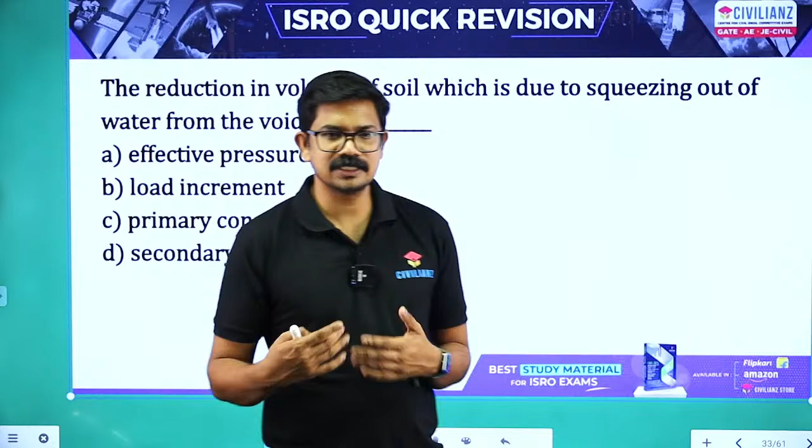Okay, so now directly we can jump into our ISRO previous year questions. Questions are very easy, so that you will get a clear idea about that. ISRO previous questions.

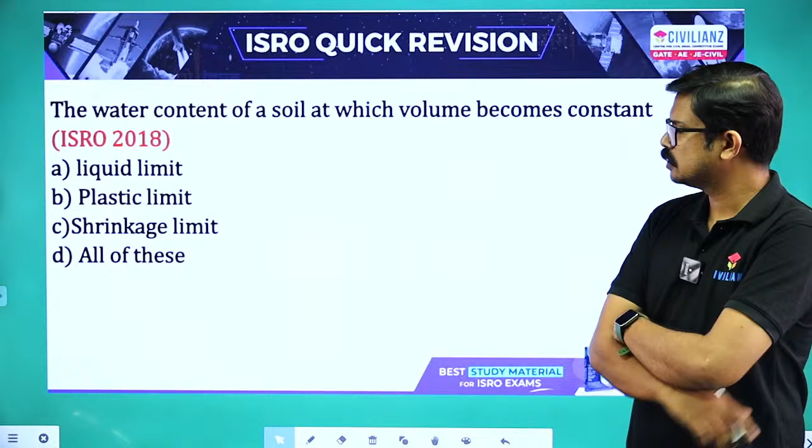Then, water content of a soil at which volume becomes constant - what is the answer? Shrinkage limit. Yes. Work out this question. 2013 they asked this. In between they asked a lot of questions, but I didn't include here, because the questions are very easy ones.

Try to work out Harinarayanan, Vaishnav, Nivedya. Try to work out this question.

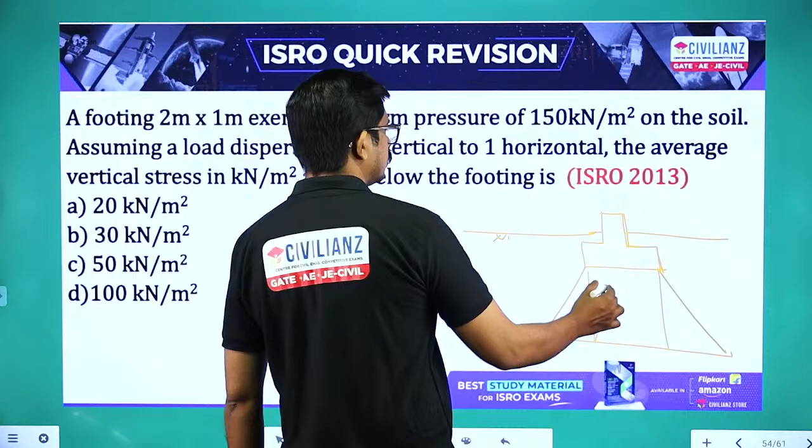Load dispersion, 2 vertical to 1 horizontal. Here a footing is there, this is at the ground level. So here load dispersion means like this, 2 vertical to 1 horizontal. Let me write here, this one is 2 meter and here this one is 1 meter. Here also load dispersion like this. So 2 meter, Z how much? 1 meter depth. Here load Q that we need to find out. Size of the footing that they have given is 2 meter by 1 meter.

So load Q is 300 kilonewton. We need to find out the value of vertical stress at this particular layer, below the 1 meter below the footing. So 1 meter below the footing means Q, 300 divided by.

Here dispersion they have given. If we move 2 horizontal, 2 vertical, 1 horizontal. So for 1 vertical, 0.5 horizontal. For 1 meter, 0.5 meter. Here also 0.5 meter. So 0.5 plus 0.5 plus 2, that is 3. 3 into 2 is 6. So 300 by 6, that is 50 kilonewton per meter square.

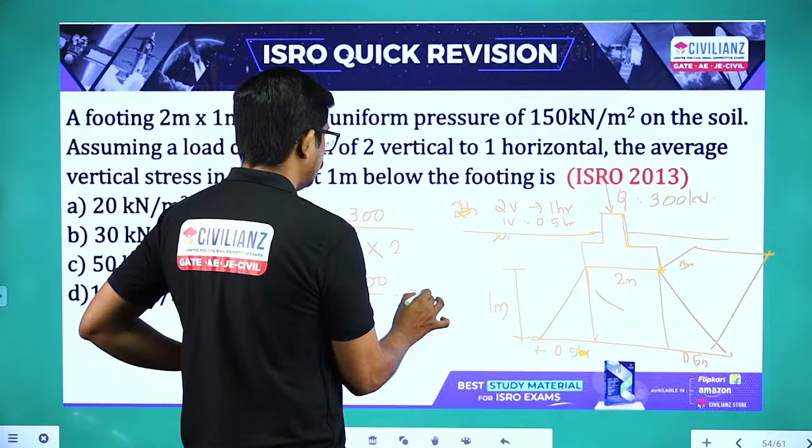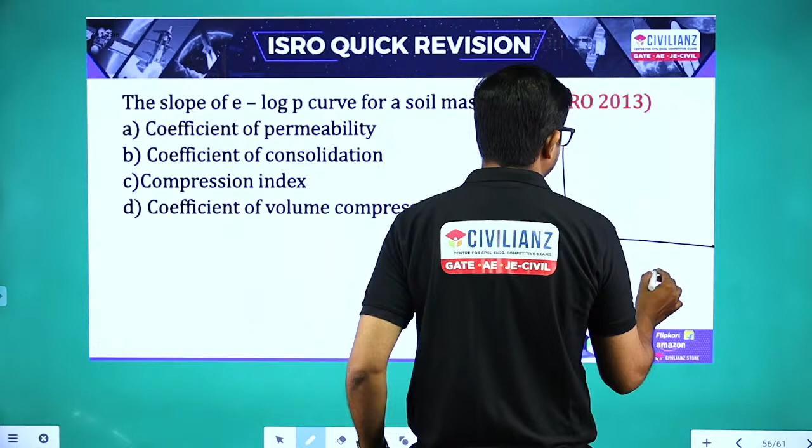So slope of E log P means, if you draw a graph like this, sigma, here void ratio, log sigma dash, here you will get a graph like this. Here the slope of this one is CC, compression index, this one is compression index. What is this one? CV, coefficient of consolidation. Then coefficient of permeability, that is K.

Compression index CC, coefficient of volume compressibility MV. So CV is equal to, you have to study this formula, K by MV gamma W. Then MV is equal to delta V by V naught into delta sigma dash. Generally, if you study this formula by heart, you are able to do every question from this consolidation.

So then another important formula for consolidation is TV is equal to CV into T divided by D square. Then TV is equal to pi by 4 into U by 100 all square, if the value of U is less than 60%. So these are the formulas that you need to learn by heart in consolidation.

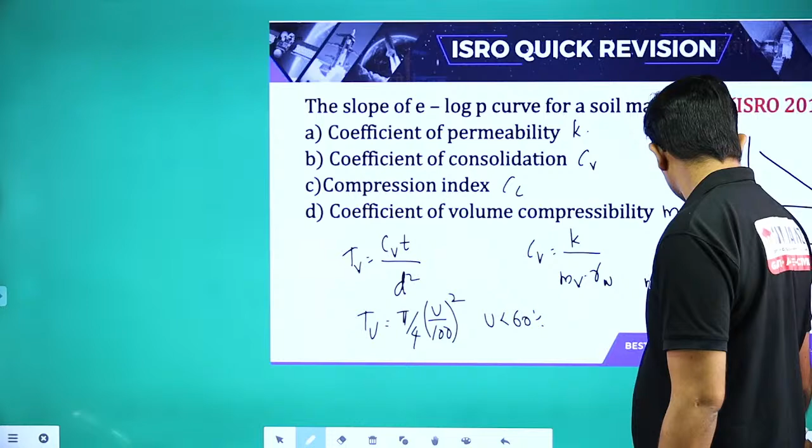Yes, last question, then after this we can wind up this session. Which one of the following conditions is valid in the case of unconfined compression test in comparison to triaxial test? Right answer is last question, then we can wind up.

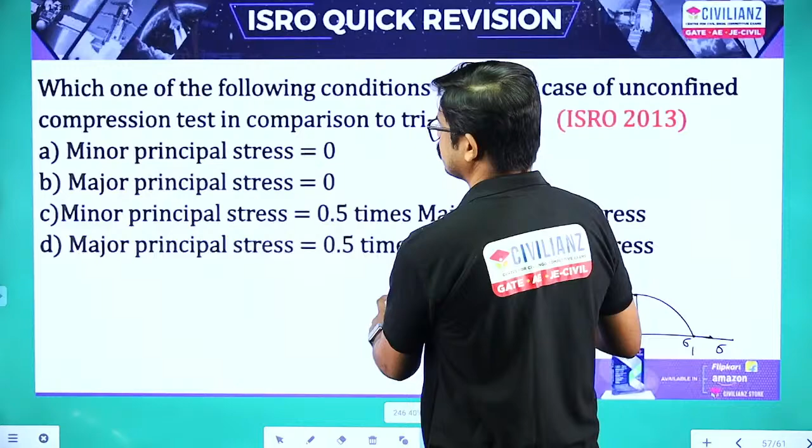Here in this question, in the case of UCS, you will get the shape of Mohr's circle like this. Here sigma and tau, this one is sigma 3 and this one is sigma 1. So here the answer is, in the case of UCS, the value of minor principal stress. Minor principal stress means here there is no confinement, sigma 3 is equal to 0. So that is why the first option is correct.

If they ask what about the value of QU? QU means this one, that is sigma 1. So here if we draw the failure plane, it will go like this. So this value, that is equal to Cu, radius that is equal to Cu. So directly we can write QU is equal to 2 into Cu. That is another very important relation. Okay, Vaishnav, that is correct.

Okay, so now here we are going to wind up our session, Geotechnical Engineering. So what I am going to say here is, you have to go through all the formulas for ISRO examination. That's all, that is enough in the case of Geotechnical Engineering. Definitely you will get, you are able to do all the questions. No issue in the case of Geotechnical Engineering for ISRO. For other examinations, you have to deal with more important concepts.